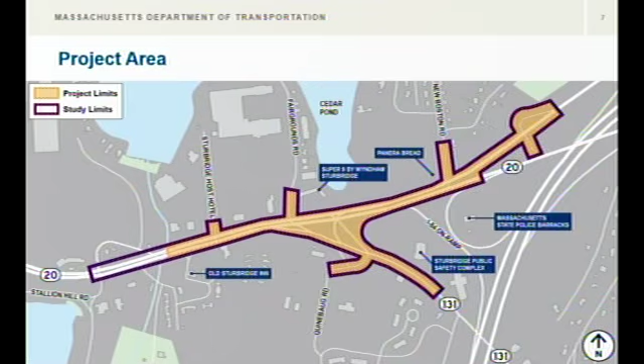So here's the project area. The highlighted area shows the extent of this project, which covers Route 20 from just west of the Burger King to the State Police jug handle. The project also extends south down Route 131 to the Hampton Inn. The dark outlined area is the area the design team used for the study.

So why was this project initiated? There is a lack of pedestrian and cyclist connectivity, as there are no crossings or bicycle accommodations within the study area. The Town of Sturbridge has created a commercial tourist district plan and completed a corridor profile for Route 20 with significant improvements to the Route 20 corridor through Sturbridge.

These improvements include enhancing vehicle traffic, access to commercial areas, pedestrian and bicycle access, reducing crashes, and enhancing the visual imagery of the corridor. The town's plan did request the installation of a roundabout at the intersection to achieve these enhancements.

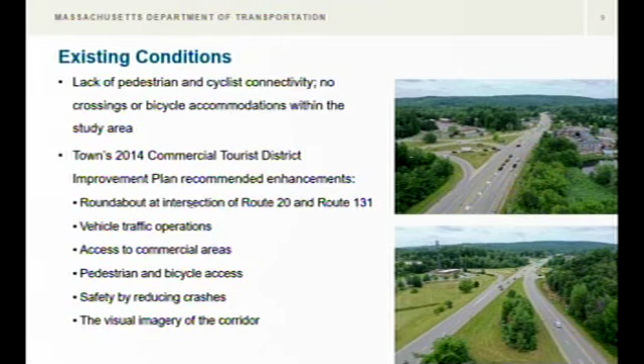And what do we want to accomplish? The goals of the project are, number one, to improve safety for vehicles, pedestrians, and cyclists, and reduce accidents. We also want to provide a gateway into the town while reducing vehicular speeds along the corridor. Pedestrian access will also be improved to allow safer walking and crossing conditions.

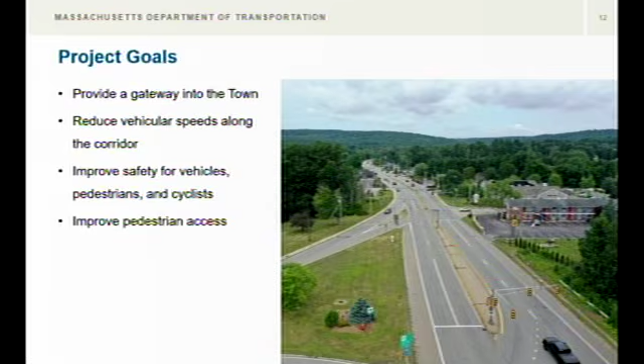And now I would like to turn the hearing over to Chris, who will go further into the design and the alternatives. Thank you, Greg. As previously stated, my name is Chris Lyman. I'm the project manager from Howard Stein Hudson for this project.

So you're probably wondering what alternatives did we consider through this process. We went through an extensive alternative analysis process that included 15 alternatives along the corridor. Those alternatives considered a combination of signalized intersections, roundabouts, and center island medians along the corridor, especially at the intersections of Route 20 and Fairgrounds Road, Route 20 and Route 131, and Route 20 and New Boston Road. After the first round of analysis, it was determined that only 3 concepts were considered great alternatives to move forward and to further process through analysis and design.

In the next couple of slides, I'll be going through the 3 alternatives that we progressed to further analysis, the preferred alternative that was selected, and the anticipated improvements and impacts that are coming from that preferred alternative.

So the first alternative we looked at was alternative 3, which included a signalized intersection at the intersection of Route 20 and Route 131 with a roundabout at the intersection of New Boston Road and Route 20. The alternative also included a continuous median along Route 20 to the western project limits on the left-hand side of the screen, and included a right-out only at Fairgrounds Road and the Sturbridge Host Hotel driveways onto Route 20 westbound. This alternative removed the existing signal at the intersection of Route 20 and Fairgrounds Road.

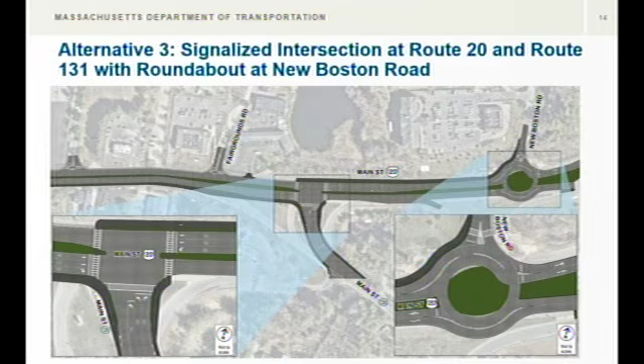This alternative was not chosen as the preferred alternative because it did not improve safety at the intersection of Route 20 and 131 to the same extent when compared to the other alternatives. This alternative also did not achieve the goal of making the intersection a gateway to the town of Sturbridge through reducing vehicle speeds as you approach the commercial tourist district.

The next alternative that was progressed was alternative 3A, which included a roundabout at the intersection of Route 20 and 131 with a roundabout at the intersection of New Boston Road and Route 20. This alternative also included a continuous median along Route 20 on the western project limits, and also included right turn out only from Fairgrounds Road and the Sturbridge Host Hotel onto Route 20 westbound.

It also removed the existing signal at the intersection of Route 20 and Fairgrounds Road. This alternative was not chosen as a preferred alternative because a roundabout at the intersection of Route 20 and New Boston Road had similar impacts to both operations and improvements when compared to other alternatives, and it was determined that it may not be desirable to have back-to-back roundabouts in such a short stretch of Route 20, when the main goal of the project was to improve safety at both the intersections of Route 20 and Route 131 and New Boston Road and Route 20.

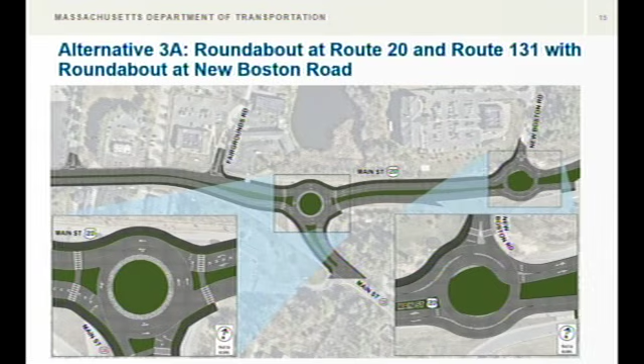So what was the preferred alternative? Based on the traffic and safety analysis performed during the alternatives analysis, alternative 1A was chosen as the preferred alternative and progressed to 25% design. The proposed design included a roundabout at the intersection of Route 20 and 131 with a right turn only out of New Boston Road onto Route 20 westbound, along with a continuous median along Route 20 to the western project limits that only allows for right turns out of Fairgrounds Road and the Sturbridge Host Hotel onto Route 20 westbound. This alternative also includes the removal of the Fairgrounds Road and Route 20 signal.

This alternative was chosen as the preferred alternative because the roundabout at the intersection of Route 20 and 131 provides a gateway to the town of Sturbridge by reducing speeds and providing multimodal connectivity throughout the project limits. The alternative was also consistent with the town of Sturbridge's 2014 Commercial Tourist District Improvement Plan. In the following slides, I'll go into further detail for the proposed design and the safety benefits of the roundabout at the intersection of Route 20 and Route 131.

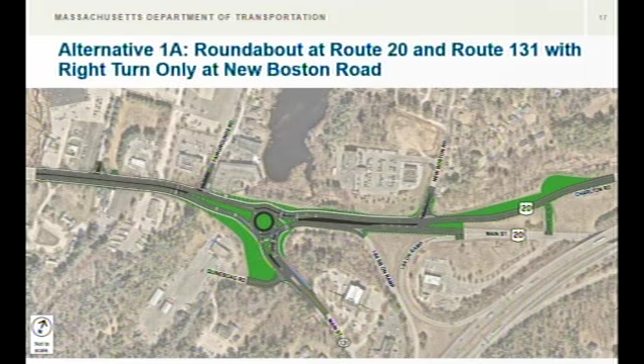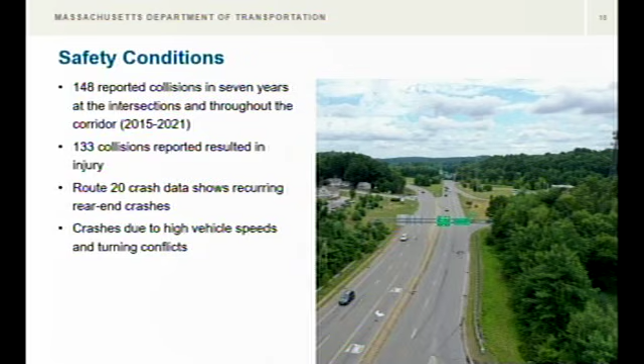A major project goal was to improve safety along this section of Route 20, especially at the intersection of Route 20 and 131 and at the intersection of Route 20 and New Boston Road. Over a 7-year period between 2015 and 2021, there were 148 collisions reported within the project limits, with 133 of those resulting in injury. Crash data along Route 20 shows reoccurring rear-end crashes at the intersection of Route 20 and 131, and reoccurring rear-end and angle crashes at the intersection of Route 20 and New Boston Road. These crashes are attributed to high vehicle speeds and turning conflicts throughout the project corridor.

So you're probably asking yourself, how does a roundabout at the intersection of Route 20 and 131 help us meet our project goals related to safety? The roundabout design follows the best practices for geometric design that allow for safer conditions at the intersection. Vehicle deflection at the approaches of the roundabout and throughout the roundabout is a key parameter that slows vehicle speeds as they approach and continue through the roundabout. That helps improve safety. As stated previously, there were 148 collisions reported along the project area.

A significant number of those came from rear-end and angle crashes, which resulted in 133 collisions resulting in injury. One reason roundabouts are safer than a signalized intersection is because it reduces the number of conflict points compared to a traditional intersection. Generally, the points of conflict at a roundabout involve sideswipe collisions at low speeds, which are less dangerous than left turn or angle crashes or head-on collisions that can happen at signalized intersections. This results in a more significant reduction in fatal and injury crashes for a roundabout compared to a traffic signal. The most severe vehicle-on-vehicle crash types are T-bone, left turn, and head-on crashes, and these are avoided by the implementation of a roundabout.

In the next slides, I'll go over the proposed design and the safety improvements proposed.

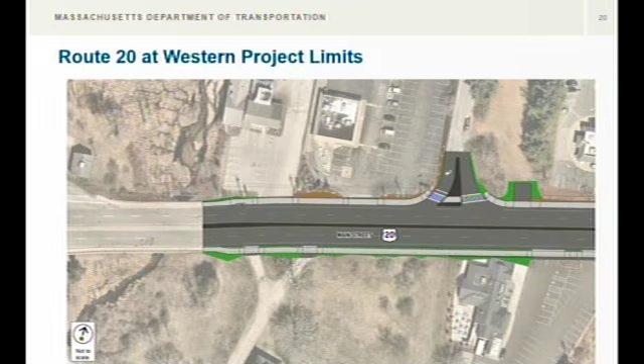As we move east along Route 20, the proposed shared use path widens from 8 feet to 10 feet wide as we approach the Fairgrounds Road intersection, on either side of Route 20, with a landscape buffer between the shared use path and the roadway. The project also proposes a mid-block crossing with a pedestrian hybrid beacon, or PHB, just west of the Fairgrounds Road intersection. This crossing allows pedestrians and bicyclists to safely cross Route 20 to access the commercial businesses on either side, which is not possible in the existing conditions.

The proposed design removes the existing signal at the intersection of Route 20 and Fairgrounds Road and replaces it with a right-out only from Fairgrounds Road onto Route 20 westbound. Vehicles wanting to travel Route 20 eastbound from Fairgrounds Road will now have to go to the jug handle at Stallion Hill Road and make a left onto Route 20 eastbound to continue. Vehicles wanting to enter Fairgrounds Road from Route 20 eastbound will have to go around the roundabout at the intersection of Route 20 and Route 131 and head back westbound on Route 20 to make a right turn into Fairgrounds Road.

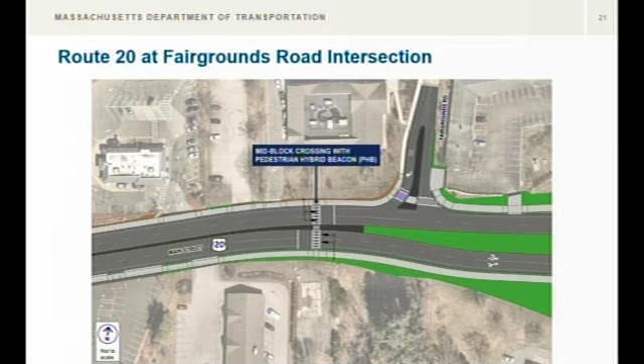As we continue east, we come to the intersection of Route 20 and 131. The project proposes to replace the existing signalized intersection at this location with a roundabout. The roundabout includes a right turn bypass lane from Route 131 northbound to Route 20 eastbound, visible on the lower right-hand side of the screen. The design also proposes a Route 20 westbound bypass lane through travel lane, visible at the top of the roundabout in the northern section.

The proposed shared use path on the south side of Route 20 continues down Route 131, and the shared use path on the north side continues down Route 20. The proposed roundabout also includes shared use path crossings with rectangular rapid flashing beacons and pedestrian hybrid beacons. The proposed center of the roundabout will be a landscaped island that will relocate the Welcome to Sturbridge sign.

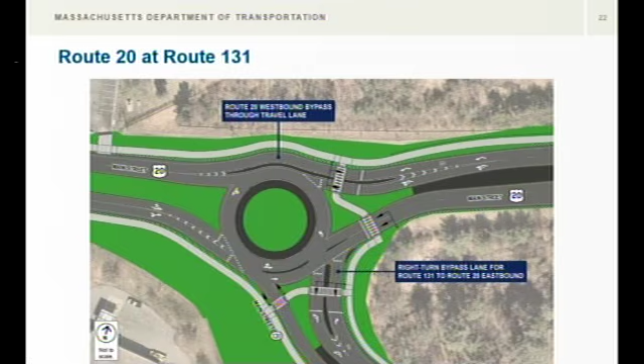As we continue east down Route 20, we come to the intersection of Route 20 and New Boston Road. The project proposes to prohibit left turns out of New Boston Road onto Route 20 eastbound. Vehicles wanting to travel Route 20 eastbound from New Boston Road will now have to go down to the roundabout at Route 20 and 131, go around it, and head back Route 20 eastbound. It does add a left turning lane on Route 20 eastbound to make left turns into New Boston Road.

The 10-foot shared use path continues along the north side of Route 20 and ends just west of the Route 20 and New Boston Road intersection, where it transitions back to a 5-foot wide sidewalk with a bike ramp just before the sidewalk transition, visible on the right side of the screen.

As you continue down Route 20, you'll see the realignment of Route 20 westbound as you approach the Route 20 and New Boston Road intersection. The alignment difference is the green space just north of the slides, which is where the original roadway was; it'll be shifting south to better tee up the intersection with Route 20 and New Boston Road. This realignment is being proposed to slow vehicle speeds and improve sight distance for traffic exiting New Boston Road onto Route 20 westbound.

As you continue to the eastern project limits, you'll come to the east-west access road and the jug handle intersection. The project is proposing to remove the existing jug handle along Route 20 westbound, and realign the east-west access road to be a one-way street from Route 20 eastbound to Route 20 westbound.

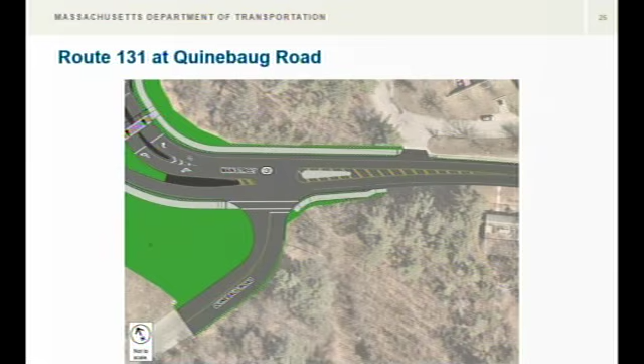I'll now turn it back over to Mike from Mass DOT to go over the right-of-way impacts.

Thanks. Good evening, everyone. My name's Michael Ruderman. I'm from the right-of-way section of MassDOT Highway Division. I'll stand so I can see the folks that are way in the back there. Thank you so much for coming tonight. We really appreciate your attendance, your interest, and especially after the meeting, your comments, because we're still in the process of making our final adjustments to the design, partly based upon the information that you have by living in this area and sharing them with us.

Let's go to the next slide, please. The right-of-way section is the part of MassDOT that uses eminent domain to acquire easements or land so that we have enough room, literally, to build the project.

I use the word eminent domain intentionally because everything that we do is governed by a set of protections and laws. They're federal and state. They are for the protection of the public, because if we are going to use eminent domain, we owe the public a certain number of procedures. One of them is to keep you informed every step of the way. That begins right here.

For the formalities, I cite that it's in federal law, the Real Property Act of 1970, and Massachusetts General Laws, Chapter 79. If you want to look at those in more detail, that's where you can find them.

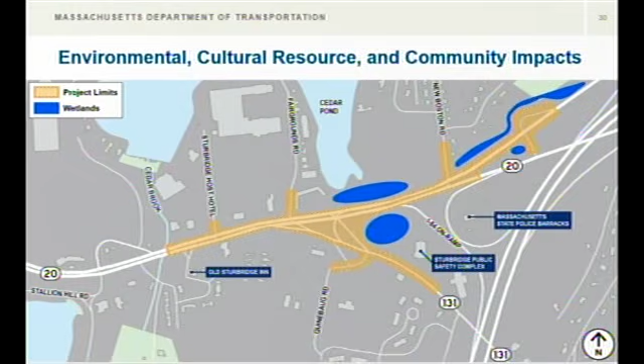The proposed design will have no adverse impacts to environmental, cultural, or historical resources that are adjacent or within the project limits. The project will impact the 100-foot buffer zone to bordering vegetated wetlands located within close proximity to the project limits. The wetland resource areas include wetlands just north of the western project limits off of Route 20 associated with Cedar Brook, wetlands north and southeast of the Route 20 and Route 131 intersection, and wetlands located on both sides of Route 20 westbound east of New Boston Road.

Also adjacent to the project limits is Cedar Pond, located north of the Route 20 and Route 131 intersection, which is classified as a great pond and will not be impacted. Historical resource areas within the project limits include the Old Sturbridge Inn and other inventoried properties around it, and the Old Sturbridge Fairgrounds area.

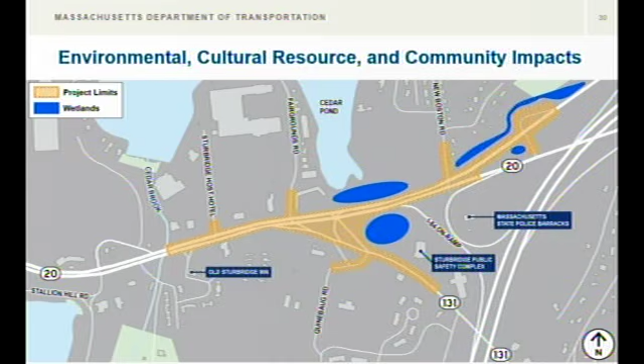In the next slide, I will go over the construction approach and potential impacts during construction.

Construction is currently scheduled to start in the spring of 2028. Construction is expected to take 2 construction seasons with 4 phases to limit disruptions to existing traffic flow, allow work to proceed efficiently, and ensure the safety of road users and workers during construction. There may be some temporary lane closures and some police details directing traffic during construction, but traffic will generally flow as it does today during construction.

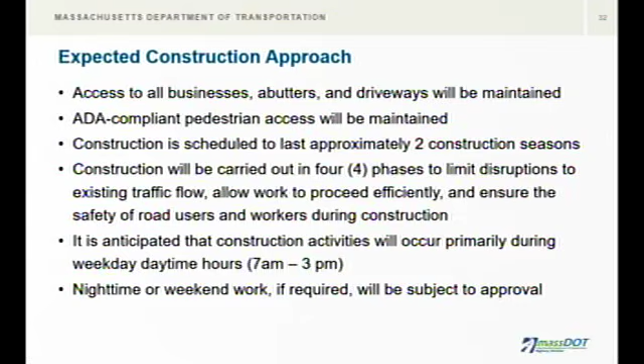Access to businesses and abutters will be maintained at all times, along with ADA-compliant pedestrian access. MassDOT will have an engineer on site to ensure the work is being done as approved. Construction activities will primarily occur during the weekday between 7 a.m. and 3 p.m. If nighttime work or weekend work is deemed necessary, it will be subject to approval. The engineer will be coordinating with town officials through regular scheduled meetings.

After tonight's hearing, we will review feedback that we receive and advance the project to a 75% design level. This design will include more detailed design documentation necessary for advertisement. This submittal will again be reviewed by MassDOT engineers and reviewers as well as town personnel. Any comments generated by the reviewers will be addressed in the 100% design submission. A final submission, or plans, specifications, and estimate submission, will be packaged up and advertised for bid. Right now, the project is scheduled to be advertised in the winter of 2028, which would lead to construction starting in the spring of 2028.

I will now hand it back to Greg from MassDOT to go over how we will keep you informed. Thank you, Nick. How will we keep you informed following tonight's hearing?

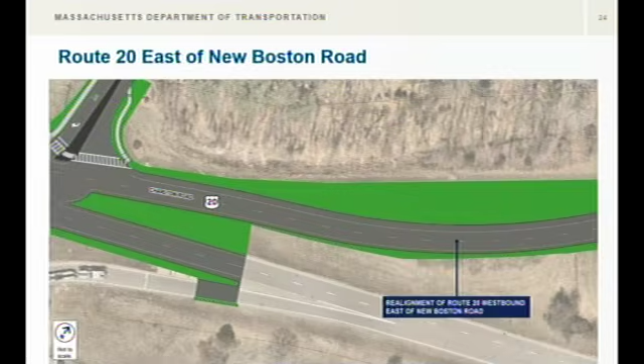So let's go to the removal of the jug handle then. Same thing there - you're making it a one-way street, but you're not preventing a left-hand turn from Route 20 westbound. People do that now. They stop on Route 20 and take the left, especially people who aren't from Massachusetts, coming off the Pike and realizing they took the wrong exit.

So you're talking about people going down the wrong way? Yeah, coming down the wrong way. That happens a lot. Right now the roadway is a 2-lane roadway that allows traffic in both directions.

Now it would be turned to a one-way. There's also no signage today, but we're proposing some. Signage doesn't mean anything - I know it's nice to say, but we had no left turn signs for a decade. We can look at the geometry and make that more difficult.

Yeah, more of a turn, because I'm telling you, people are going to do it. 'Cause they do it now. I don't know how many people are going to use it this way.

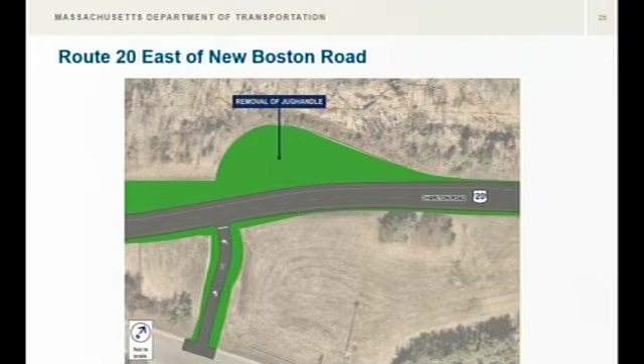Another big thing we look at too - I just want to make sure I'm clear. When I say they do it now, I'm not saying they use the jug handle to do it. They stop on Route 20 and they take a left.

So in this one, we'll look at whether we can make the geometry angled a little bit more, so it really is a big sweeping curve to make in there. The one thing I'm concerned about is that if we do that, it's making it more than a 90-degree angle for people having to look over their shoulder.

And we're going to get to a point where they're almost looking into your blind spot, as you would call it. Yeah, I know what you're saying. So I can look at trying to angle it a little bit more so that it's more than a 90-degree turn to get in there, but less than, I guess you'd call it, like 130 degrees - so you're not looking over your shoulder for cars going 45 miles an hour.

Right, just a little bit. There's a little psychological line of sight component we can definitely look into.

So now it will only be for authorized vehicles only. I mean, if it's a little tougher to get out, they can put on their lights.

And I also want to stand to the fact that this is going to be only an access for police vehicles now, authorized police vehicles. Again, they might not do it. It's going to be the same thing you see a lot on the Mass Pike.

There's also going to be - we can actually make that angle a little more, because we're also talking with the Mass State Police right now about putting in flashing lights so that when they enter these locations, they can activate them to warn cars farther up Route 20 westbound that there is a police vehicle entering. So that might allow us to make that even more of a turn away from it, because there will be advanced warning that a state trooper or police vehicle is entering.

When police flip on their lights, everyone slows down. That would be convenient. Somewhere they have to flip on their lights to activate, but these flashes would be farther upstream, so vehicles will see a sign that says 'Police, emergency vehicle entering.' Exactly. Okay, thank you.

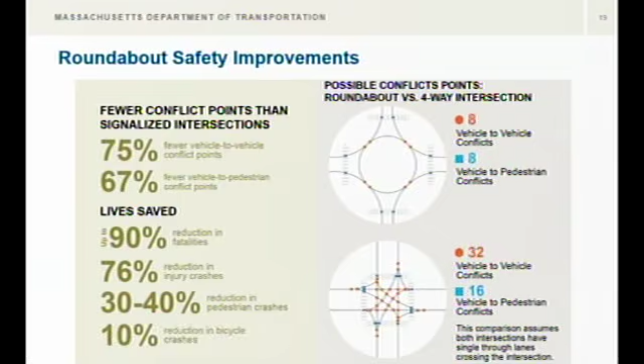Right now, there's nothing stopping a vehicle that comes off of 84 and continues to go 45, 50 miles an hour and go right through a green light or run a red light and hit a vehicle making a turn. It's just a straight shot. With the roundabout, it's a physical barrier where they have to stop and slow down to our required speed, approaching at 30 miles an hour, to go through it. They're not going to stop at a red light, but they have no choice in a roundabout unless they're going to run right through it.

And my other question is, right now, the way the traffic pattern is at that light, if you're coming from 131 from the Southbridge area, you have a light, you can go. Now if they put in that rotary, you're going to have to dodge cars to go around the rotary to get in your direction.

In my personal opinion, it's making the issue worse, not better. New Boston Road absolutely needs a rotary there, and so does the one up by Cracker Barrel. But 131 and 20, it's been working beautifully for years, and I disagree about the accidents. They're all up at the other end, not many of them are right there at that intersection. I know we have them.

Yeah, do you have a list of where they happen on the street? We have an actual diagram. Okay, I'd like to see that if you continue to roll all the way down.

So do you have room for changes? Yeah, so we are looking at public input, so I just want to pull this up. And I have one other comment.

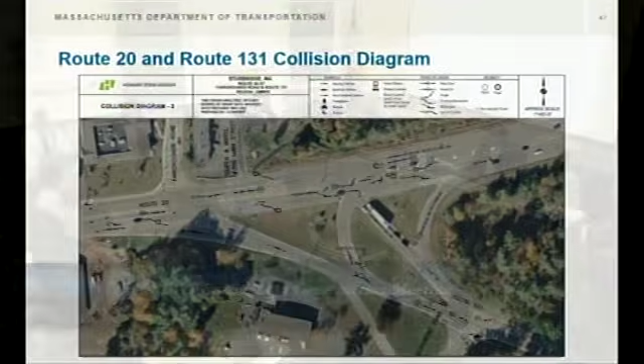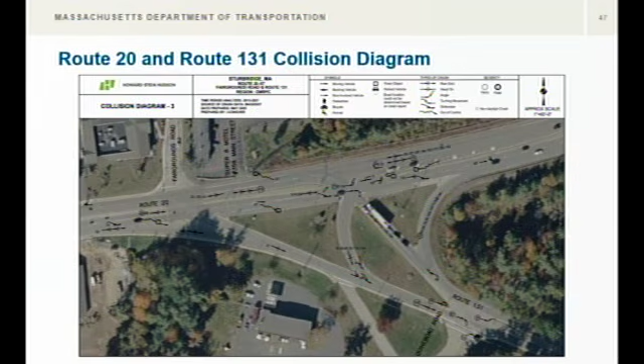And when somebody drops one of those traffic jargon things like WB-67, I think, god, got to explain it. Wheelbase 67, that's an 18-wheeler, that's something with a wheelbase of that many feet. They measure and design for these very conditions that you see.

So I'm saying, they've seen it. Yeah, well just like the one up in Oxford, you can't get two tractor trailers to go around that thing at one time. This one is definitely more spaced out than the Oxford one, I can promise you that. This one, like I said, it's meant for 67s to go through it, which is the bigger trucks, actually bigger than fire trucks.

We looked at all the vehicles that come out of the safety complex, which is right here on 131. We ran ladder trucks through here to make sure they can make it through it. Like I said, the bottom half of the roundabout is 32 feet wide, and a fire truck is allowed to take as many lanes as they want. They also have the 12.5-foot mountable island, so you're talking about roughly close to 45 feet of navigable lane through the roundabout that an emergency vehicle could use to get through.